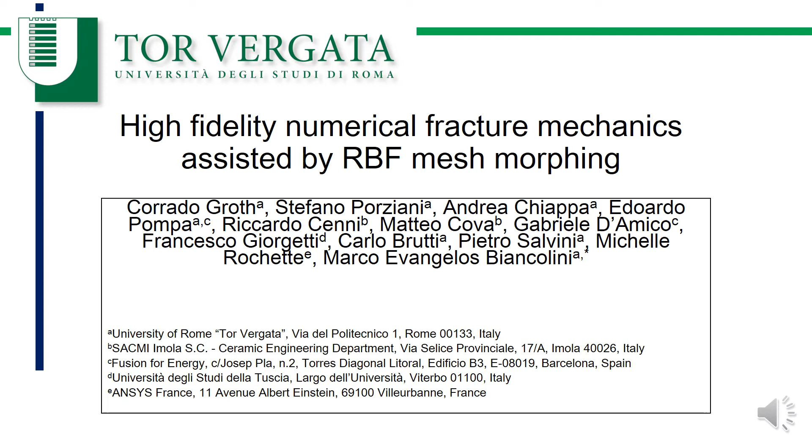To prevent sudden and unexpected breaks that could lead to catastrophic failures and safety problems, it is required in several fields to study and predict the behavior of crack growth. A component undergoing cyclic loading may, indeed, experience the generation of cracks that, generally, initiate on material surfaces in correspondence of singularities or stress concentrations.

The evolution of numerical prediction tools and the increase of the computational power allows today to adopt well-consolidated and accurate finite element-based methodologies, able to predict the evolution of the flaw by recurring to the concept of the stress intensity factor. An intrinsic characteristic of the FEM-based methods is, however, the requirement of a continuous remeshing to accommodate the numerical domain to a newly achieved crack geometry at each fatigue cycle.

In this context, radial basis functions mesh morphing is emerging as a viable solution to replace the complex and time-consuming remeshing operation. The RBF-based mesh morphing tool can be indeed employed for the study of the crack growth, updating the flaw front by automatically morphing the mesh, obtaining an evolutionary workflow suitable to be used for industrially sized grids. In this work, a review of the fracture mechanics applications tackled by synergically employing a commercially available FEM solver, Ansys Mechanical, and RBF Morph, will be shown.

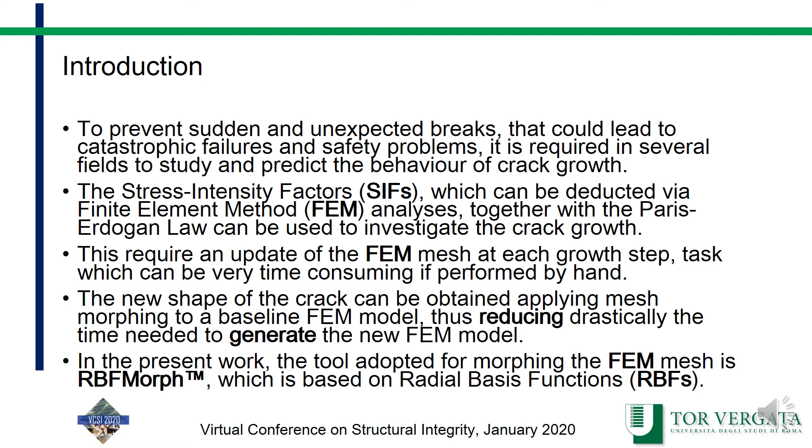Among the interpolation methods available for engineering calculation, RBF are a very powerful tool, able to determine the values of a scalar function starting from a discrete set of points, named source points, in the native space or in any of its subspaces. The interpolating function is composed by a radial basis and by a polynomial. RBF can be defined in a generic n-dimensional space and depend on the distance that, in the case of morphing, can be assumed as the Euclidean norm of the distance between 2 points in space.

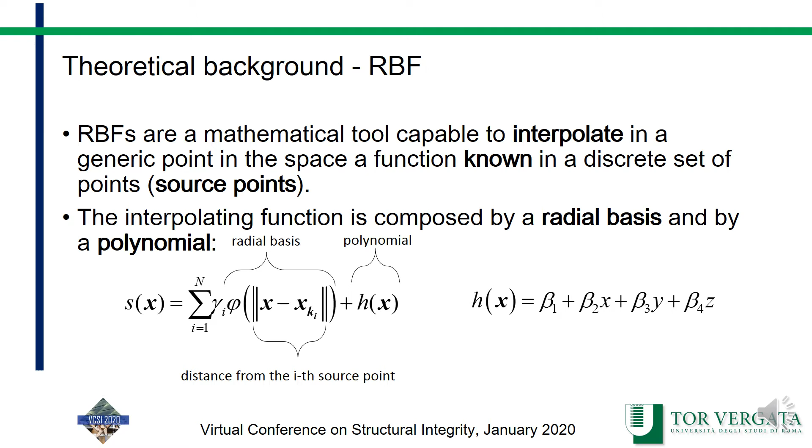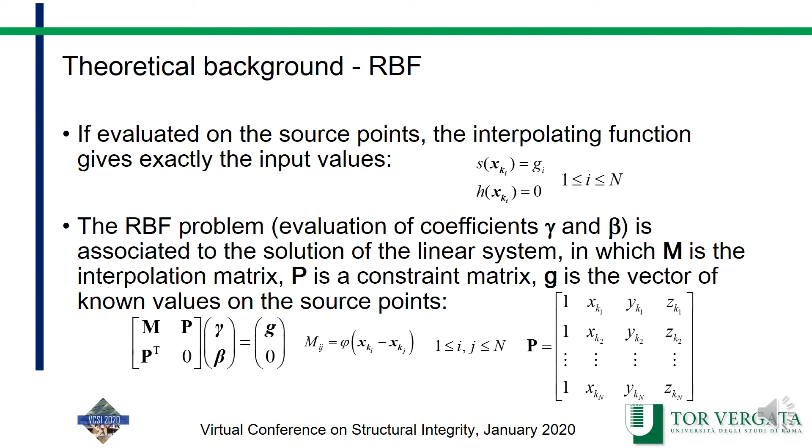If evaluated on the source points, the interpolating function gives exactly the input values. The solution of the RBF problem is associated to the solution of a linear system, the complexity of which depends non-linearly on the number of source points taken into account. Once solved the RBF problem, each displacement component can be interpolated by means of a linear system. Different RBF kernels can be chosen depending upon the wanted interpolation behavior.

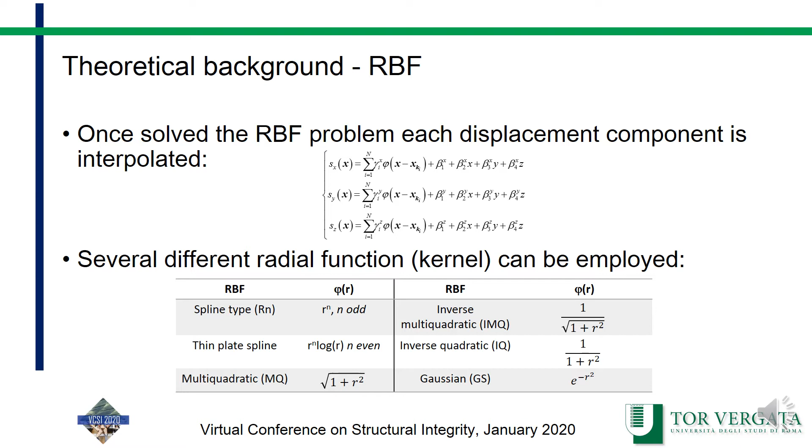To evaluate the crack evolution, the displacement component can be imposed to the nodes of the crack front using mesh morphing. By exploiting the stress intensity factor, the Paris-Erdogan law can be used as shown in this slide. The effective stress intensity factor can be extracted for a given node from a finite element analysis, calculating the relative displacement at each iteration. The number of loading cycles related to such calculated value can be extracted employing the inverse formulas.

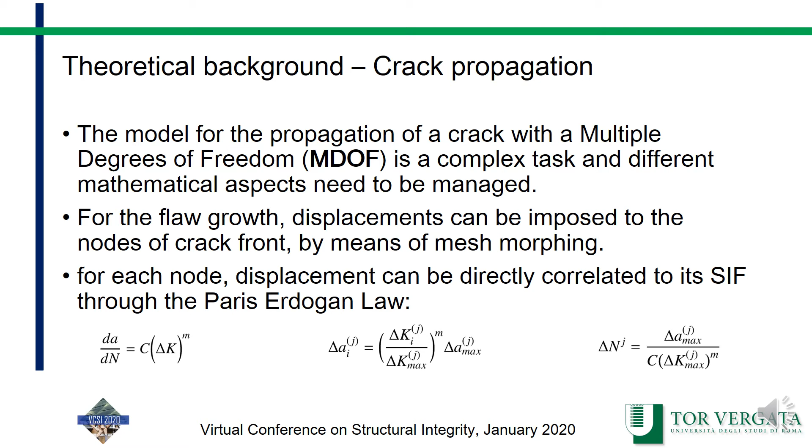The proposed flow was first implemented in Ansys Workbench for a simple circular notched bar, employing literature geometry. After a mesh convergence test with respect to the notch concentration factor, a first benchmarking was executed on a predefined set of crack geometries to test the reliability of the numerical results obtained by RBF mesh morphing, comparing them to a full remeshing.

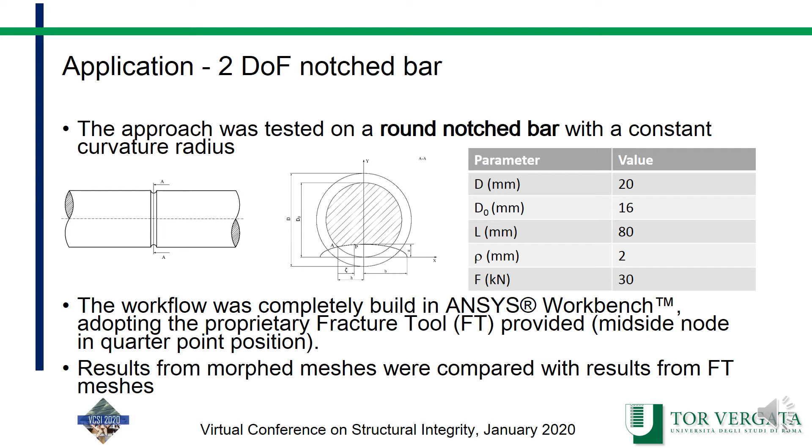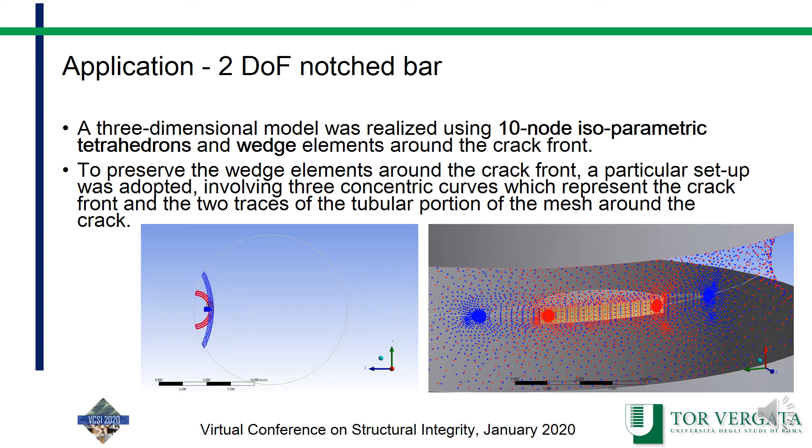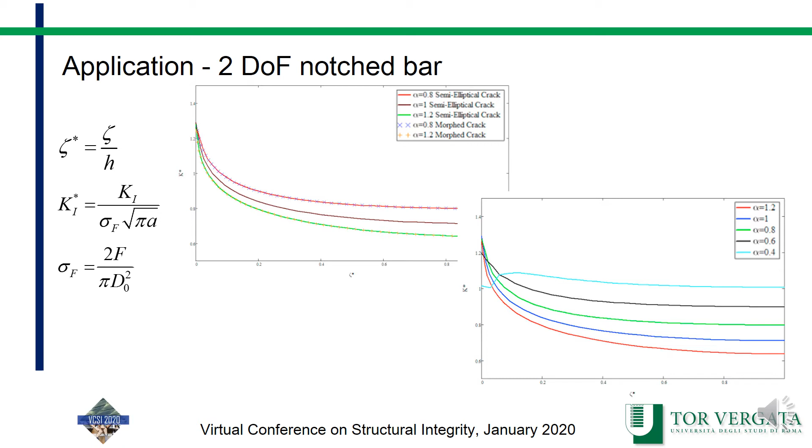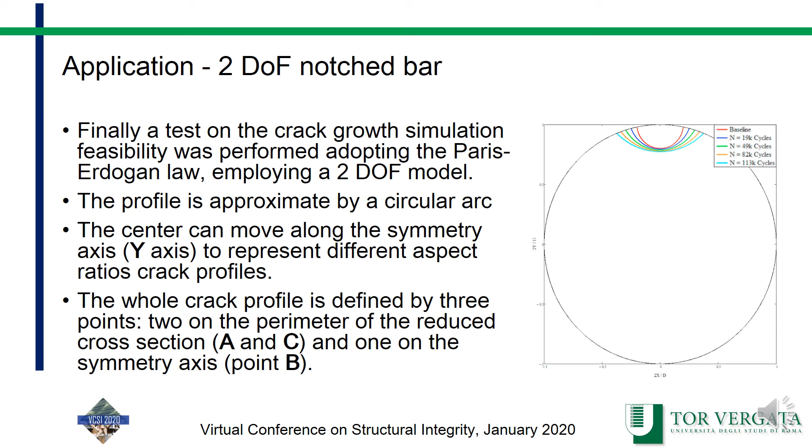Having demonstrated the ability of RBF morphing to adapt the crack shape to a new geometry, a crack growth simulation was carried out, employing the Paris-Erdogan law with a 2 degrees of freedom model. The profile, approximated by a circular arc, was controlled by 3 points, A and C on the perimeter of the reduced cross-section, B on the symmetry axis. Results of crack propagation obtained for different numbers of cycles are shown in figure.

The proposed method, refined for a three-dimensional problem, was also applied for the propagation study of a crack in a multi-degree of freedom case, evaluating its development from the free surface appearance to its complete evolution. An undersurface crack has indeed a circular conformation until the breakout. Once it reaches the surface, the crack geometry assumes an omega shape that, during its evolution, transforms into a semi-elliptical configuration, as shown in the figure.

This study aimed at two results. First, that mesh morphing allows us to reproduce the omega shape. Second, that the multi-degree of freedom model can be employed to demonstrate that the three-dimensional flaw evolves from an omega shape to a semi-elliptical one during its development.

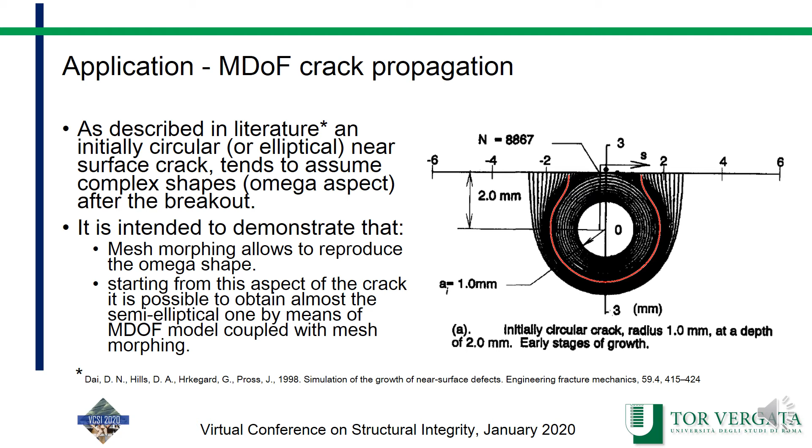The starting omega-shaped crack mesh was first obtained by deforming, by means of radial basis functions, the mesh representing the semi-elliptical final configuration, in order to have a fair term of comparison in terms of geometries. The final evolved flaw shape can be compared, after the study, with the one employed as a starting configuration before the initial morphing. The Ansys fracture tool was used to generate the semi-elliptical crack employed as a starting point.

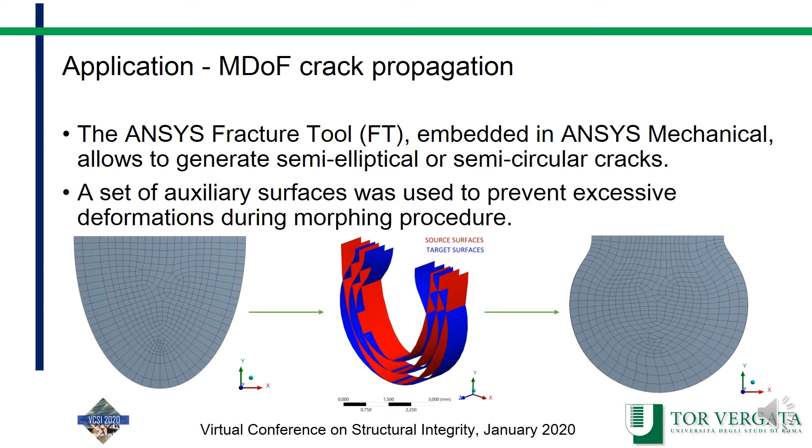The RBF setup employed to obtain such a deformation consisted in controlling directly the crack front and smoothly describing a similar deformation to the boundaries of the quarter node wedges wrapping the crack. Displacements were computed using the stress intensity factors and the Paris-Erdogan law for each node, applying them normally with respect to the crack front. Results in terms of crack shape and stress intensity factor are shown during crack evolution.

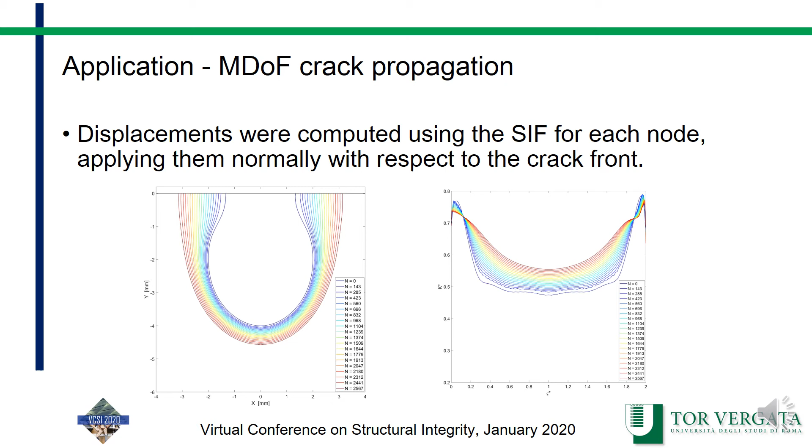To finally demonstrate its capability to tackle complex industrial applications, the method was applied to the evolution of two initial elliptical cracks in one of the port stubs of the ITER vacuum vessel sector 5, and results have been compared to the ones obtained by the assessment performed in accordance with the RCC-MR nuclear code.

After a first structural analysis, in which the most favorable location for the crack generation and evolution was identified as the corner smoothed edge of the port stub, the propagation analysis was carried out with the same setup both for the 2 degrees of freedom model assessment, foreseen by the nuclear codes, and the multi-degree of freedom model, to compare results.

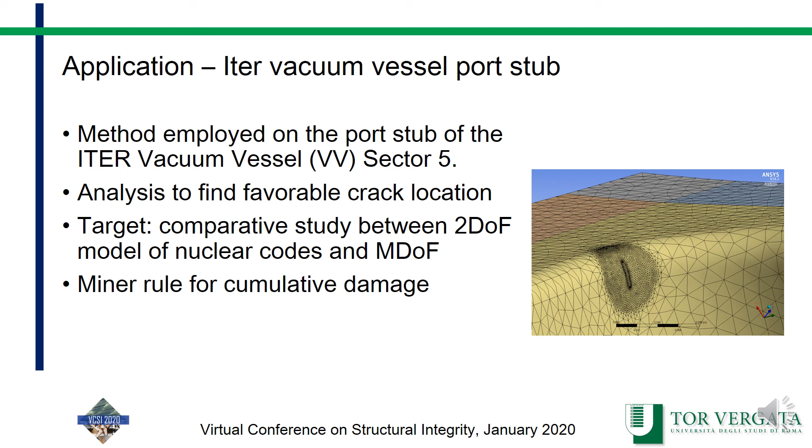The crack in the corner smoothed edge of the port stub was inserted by means of the Ansys fracture tool. The full load spectrum, such as gravity, normal operation conditions, major disruption, and magnet fast discharge, was taken into account by using the Miner rule as detailed in the ITER vacuum vessel load specification manual. The evolution of the crack half width has been plotted against crack depth for the estimated life of 7,280 cycles. The comparison of the crack geometrical parameters demonstrates that the two models lead to very similar results.

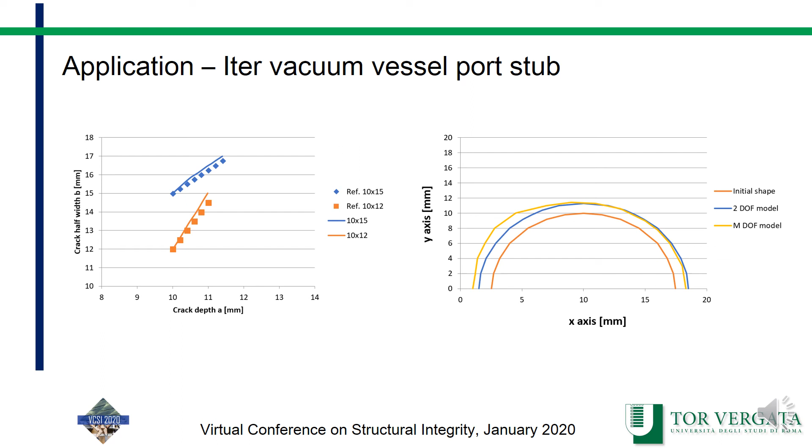For geometrical reasons of the port stub, the fracture parameter curves are not symmetric with respect to the elliptical crack minor axis. In this condition, the multi-degree of freedom model describes with a more accurate level of detail the asymmetric evolution of the crack, which leads to a higher growth of the crack side close to the smoothed edge, while the crack of the 2 degrees of freedom model remains elliptical during its evolution.

A review of applications tackling numerical fracture mechanics, obtained by exploiting state-of-the-art FEA (Ansys Mechanical) and mesh morphing (RBF Morph) tools, was given. Two different approaches were presented in order to study the flaw evolution by deforming the computational grid according to the Paris-Erdogan law using radial basis functions. First, a 2 degree of freedom model guiding the in-plane crack development by using two stress intensity factor values, one on the in-depth point of symmetry and one on the surface.

Then a multi-degree of freedom model was put in place, evaluating the stress intensity factor along the crack profile and guiding its evolution by projecting the displacements along the crack normal. These two approaches were first demonstrated on a notched bar and compared to literature data, then applied to the vacuum vessel port stub of the fusion nuclear reactor ITER, demonstrating the ability of the proposed methods to tackle the evolution of a crack in a three-dimensional problem.